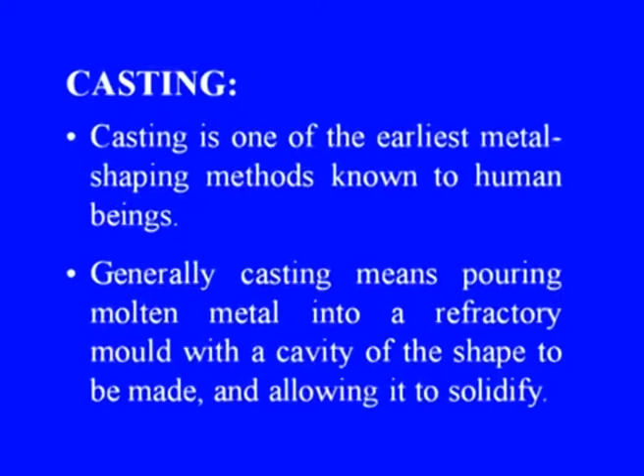Casting is one of the earliest metal shaping methods known to human beings. Generally, casting means pouring molten metal into a refractory mold with a cavity of the shape to be made and allowing it to solidify. Once solidified, the object is taken out from the mold either by breaking or by taking the mold apart. The solidified object is called casting.

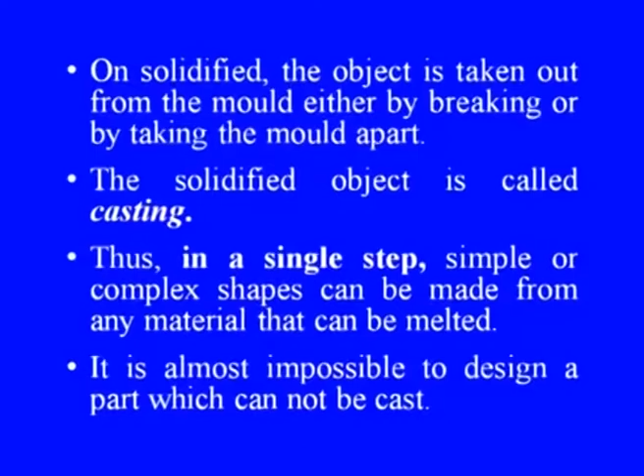Thus, in a single step, simple or complex shapes can be made from any material that can be melted. It is almost impossible to design a part which cannot be cast.

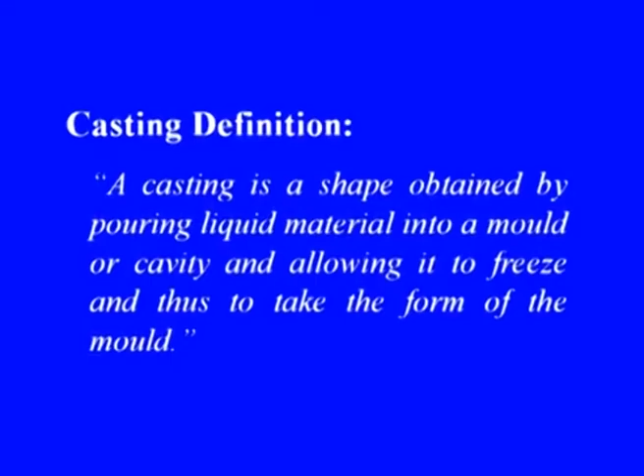Let us see a formal definition of casting. I quote, "A casting is a shape obtained by pouring liquid material into a mold or cavity and allowing it to freeze and thus to take the form of the mold." Unquote.

Let us peep into a little historical background of this process. Casting was probably discovered around 3500 before Christ in Mesopotamia. These molds were essentially of single piece.

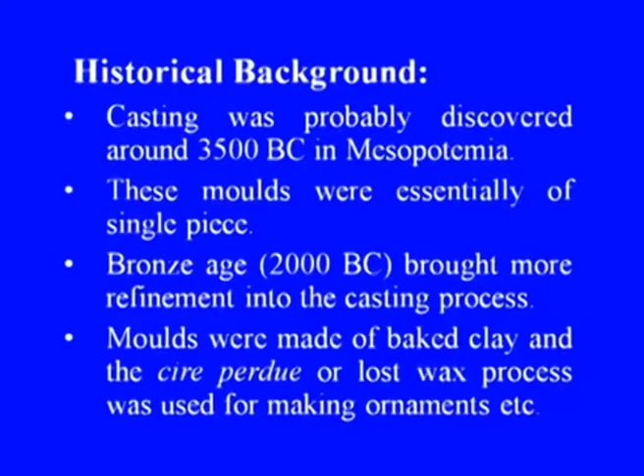The Bronze Age, estimated at 2000 BC, brought more refinement into the casting process. Molds were made of baked clay, and the cire perdue, or lost wax, process was used for making ornaments, etc. The technology was greatly improved by the Chinese from around the year 1500 BC.

The Indus Valley civilization has evidence of cast products too. Here is a photograph of a cast mold.

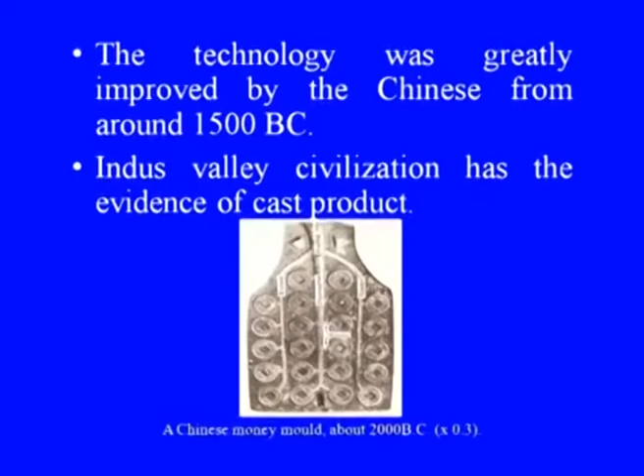Now, let us see the casting problem. It can be basically divided into two areas: the design and production of the mold, and second, the melting, refining, and pouring of the liquid metal.

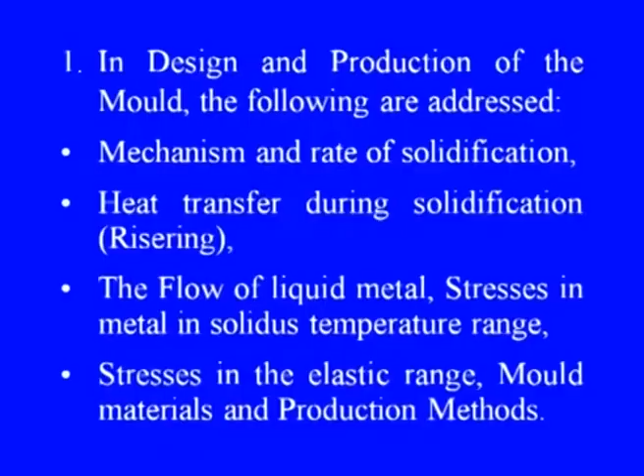In design and production of the mold, the following are addressed: mechanism and rate of solidification, heat transfer during solidification, the flow of liquid metal, stresses in metal in the solidus temperature range, stresses in the elastic range, and mold materials and production methods.

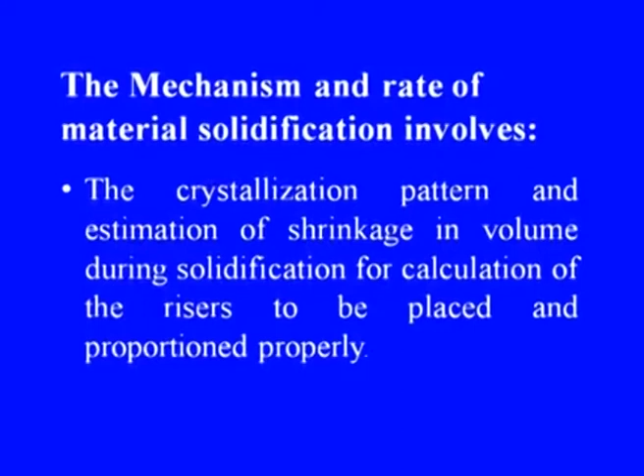The mechanism and rate of material solidification involves the crystallization pattern and estimation of shrinkage in volume during solidification, for calculation of the risers to be placed and proportioned properly. These factors vary considerably depending upon the chemical composition of the material and thermal gradients in the mold. Thus, in this process, engineering analysis tools can help significantly.

The melting, refining, pouring of the liquid material aspect is generally studied through: number 1, gases in materials; number 2, control of common elements; and number 3, selection and control of melting furnaces.

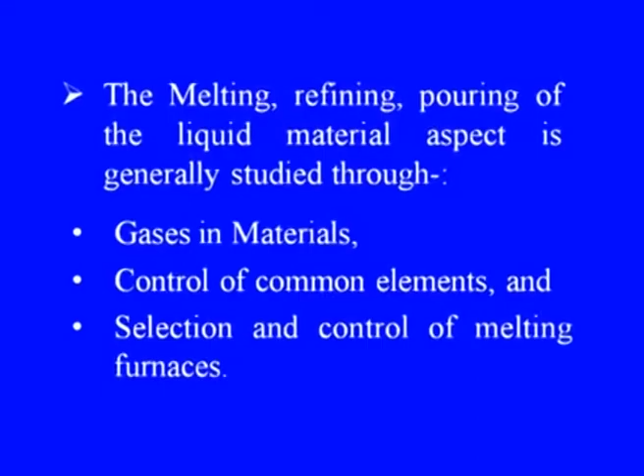Now let us look into the solidification process. The time taken for solidification of casting is relatively a very brief period in the entire production history. During this short time, the original crystal structure of the casting is formed, which is considered the backbone of the casting, on which many other properties depend. In this interval, major flaws such as shrinkage, porosity, hot tears, and seams can be prevented depending upon the care with which the solidification has been planned.

Let us now discuss the crystal nucleation process. There are two types of nucleation: number 1, homogeneous nucleation, which is the formation of a new phase without the help of special nucleation sites; and number 2, heterogeneous nucleation.

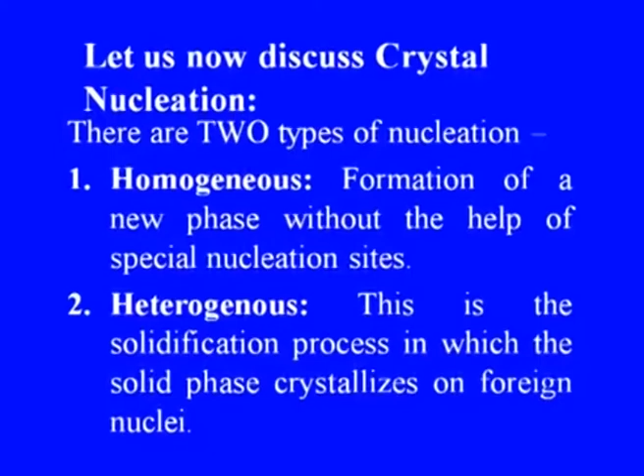In the heterogeneous nucleation process, the solidification process is one in which the solid phase crystallizes on foreign nuclei. The temperature at which homogeneous nucleation takes place is always below the equilibrium freezing point, because it is necessary to overcome the surface tension forces which slow down nucleus growth.

The energy required to produce a nucleus of solid is the difference in free energy per unit of volume between the liquid and solid phases. This energy, also called the bulk free energy change, is designated as delta F(V), expressed in calories per cubic centimeter for a given temperature of supercooling.

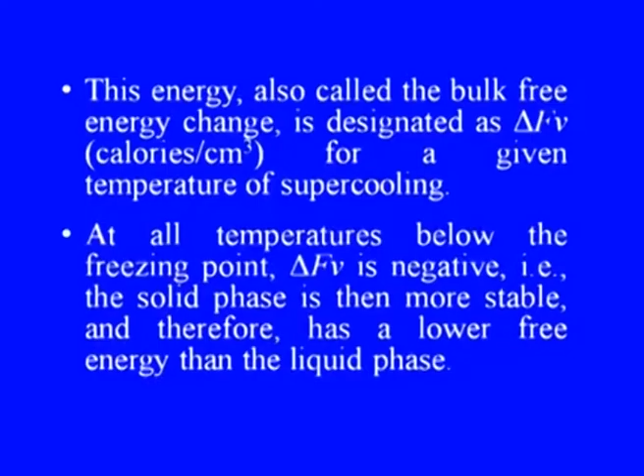At all temperatures below the freezing point, delta F(V) is negative, that is, the solid phase is then more stable and therefore has a lower free energy than the liquid phase.

The bulk free energy change associated with the formation of a spherical particle of radius r is given by 4/3 into pi r cube into delta F(V).

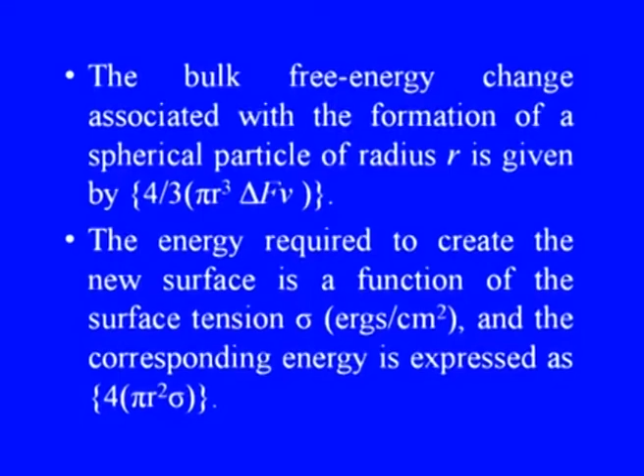The energy required to create the new surface is a function of the surface tension sigma, expressed in ergs per centimeter square, and the corresponding energy is expressed as 4 into pi r square into sigma.

The net free energy change, delta F, is then expressed as delta F equals 4 pi r square into sigma plus 4/3 pi r cube into delta F(V).

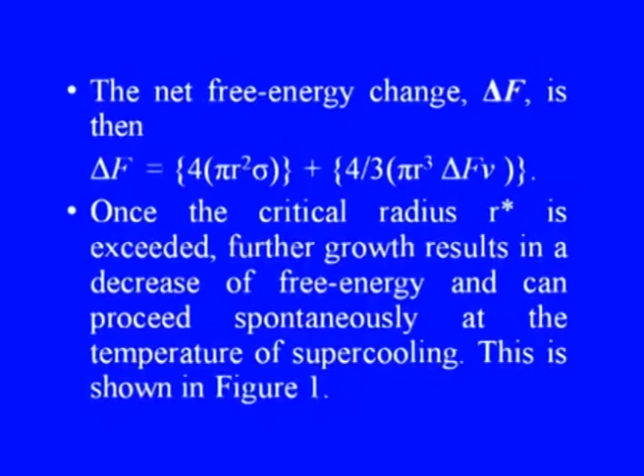Once the critical radius r star is exceeded, further growth results in a decrease of free energy and can proceed spontaneously at the temperature of supercooling. This is shown in figure 1, where this is the critical radius r star.

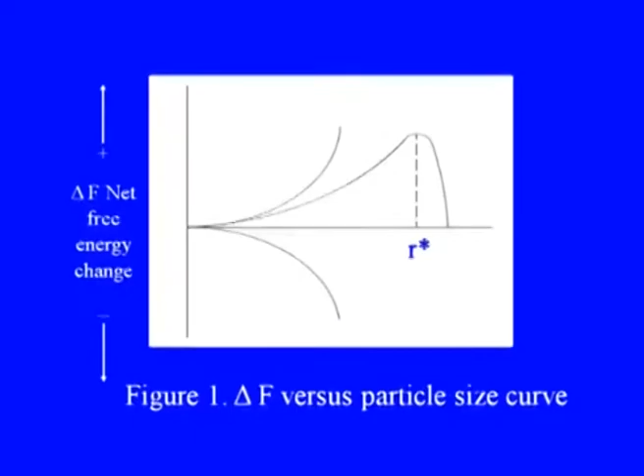If a particle has a radius smaller than r star, it will redissolve because this decrease in size reduces the free energy.

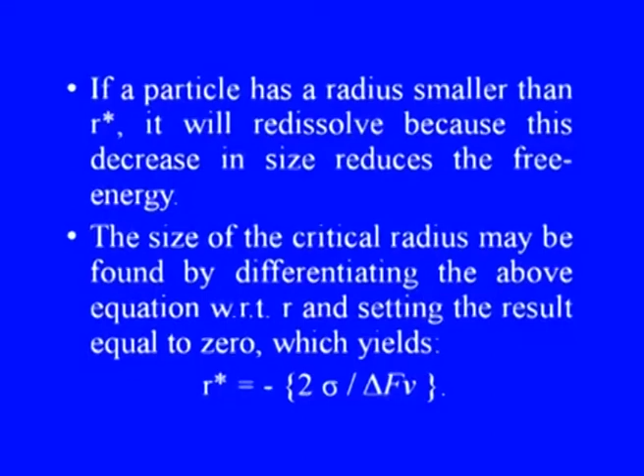The size of the critical radius may be found by differentiating the above relationship with respect to r and setting the result equal to 0, which then yields r star to be equal to minus 2 sigma by delta f v.

The r star relation indicates that for r star to become very small, delta f v must become very large in a negative sense. That is, severe supercooling is needed for homogeneous nucleation. Also, the term sigma does not change greatly with temperature. On the other hand, delta f v increases with supercooling and therefore causes a very small nucleus to be stable.

Let us come into heterogeneous nucleation process. Most actual castings crystallize by heterogeneous nucleation process. The reason being, if the new phase can find a foreign particle to grow upon, it can adopt the relatively large radius of the particle as its own. It means only a slight degree of supercooling is needed in comparison with that needed for homogeneous nucleation.

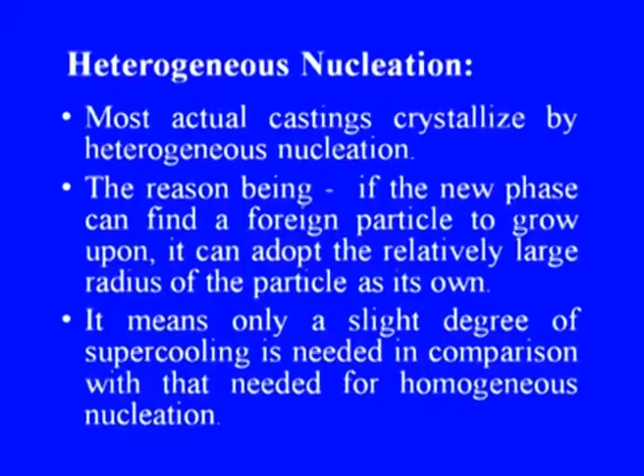Quantitatively, the relation depends upon the degree to which the new phase wets the foreign particle. If there is no attraction between the atoms of the foreign particle and those of the precipitating phase, then nucleation is not helped.

The wall of a mold usually provides many heterogeneous nucleation sites. That is how the solidification process begins.

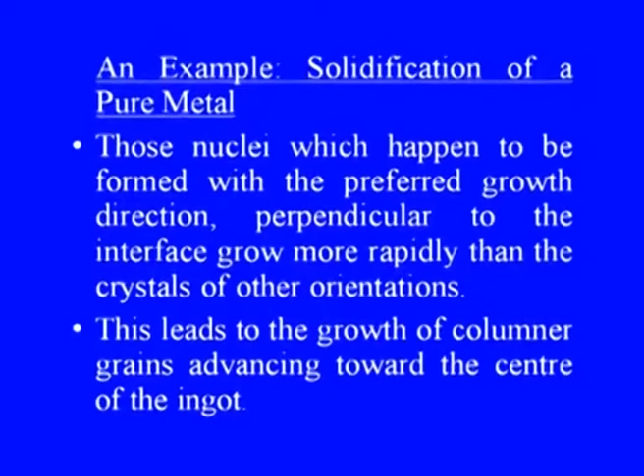Let us see an example of solidification of a pure metal. Those nuclei which happen to be formed with the preferred growth direction perpendicular to the interface grow more rapidly than the crystals of other orientations. This leads to the growth of columnar grains advancing towards the center of the ingot.

The final structure therefore consists of a thin layer of randomly oriented grains at the mold surface and columnar grains extending to the center line. In this situation, there are no randomly oriented grains at the center of the ingot.

Solidification of actual castings. The solidification of alloys differs in three principal ways from that of pure metals. Number 1, usually the freezing of alloys occurs over a temperature range. Number 2, the composition of the solid which separates first is different from that of the liquid. And number 3, there may be more than one solid phase crystallizing from the liquid.

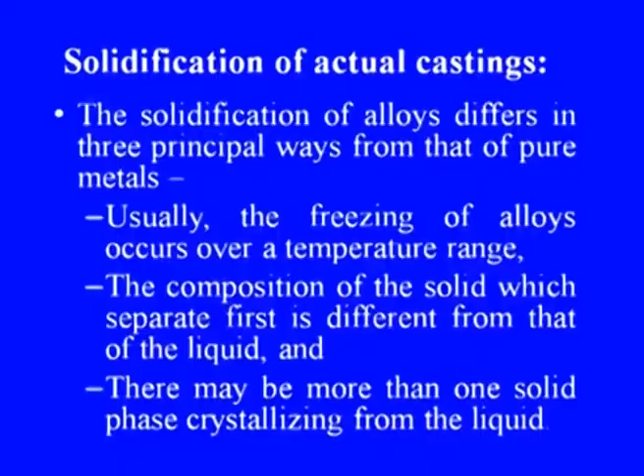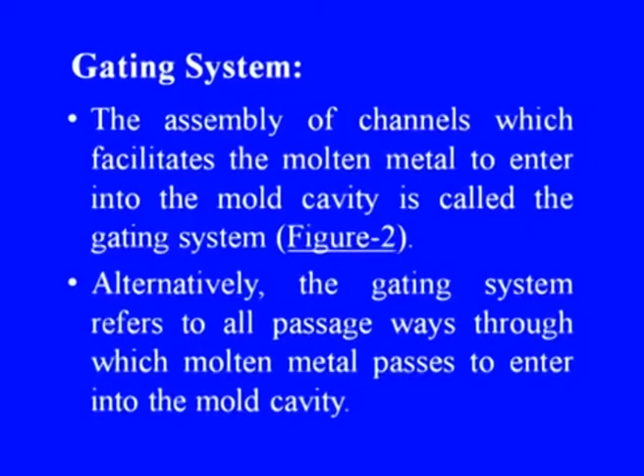Now let us see a gating system. The assembly of channels which facilitate the molten metal to enter into the mold cavity is called the gating system, as shown in the figure. Alternatively, the gating system refers to all passageways through which molten metal passes to enter into the mold cavity.

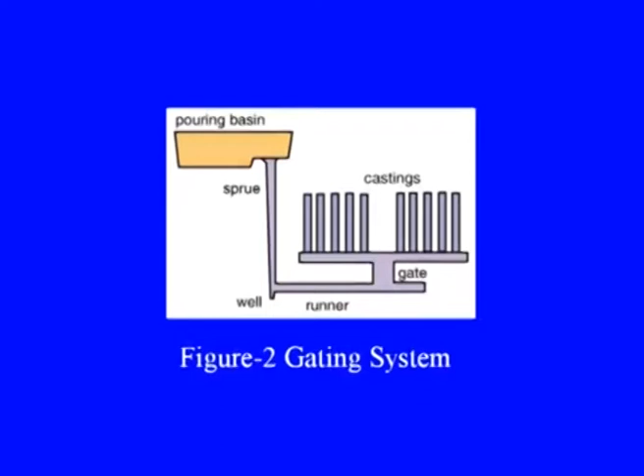This is a typical gating system in which this is the pouring basin. The molten metal comes through the sprue, which is constructionally tapered in shape. Then the liquid metal is distributed through this gating system into the various cavities.

What are the goals of a gating system then? This is to minimize turbulence to avoid trapping gases into the mold, then to get enough metal into the mold cavity before the metal starts to solidify. Then another goal is to avoid shrinkage.

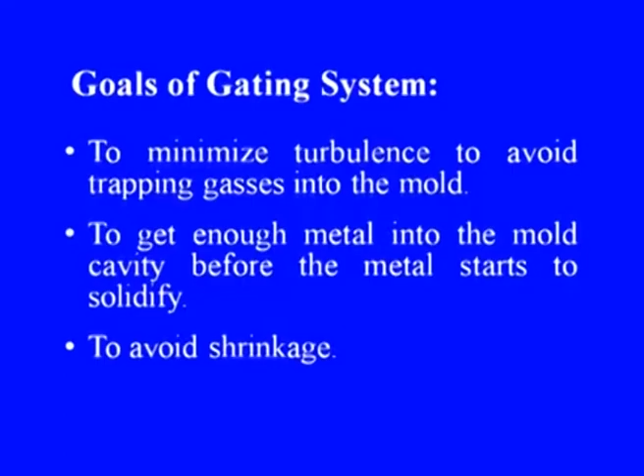To establish the best possible temperature gradient in the solidifying casting, so that the shrinkage, if it occurs, must be in the gating system, not in the required cast product. Thereby, it helps in retaining the appropriate or desired tolerances.

It also incorporates a system for trapping the non-metallic inclusions. The major design principles of gating system are as follows.

Turbulence can be avoided by incorporating small changes in the design of the gating system. The sharp changes in the flow should be avoided in favor of smooth changes. The gating system must be designed in such a way that the system always runs full with the liquid metal.

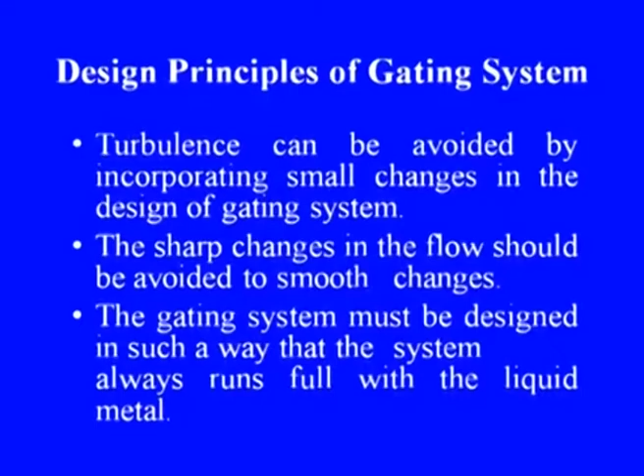In gating system design, sharp corners should be avoided. Any changes in direction or cross sectional area should make use of rounded corners. To avoid aspiration, tapered sprues are designed in the gating systems. A sprue tapered to a smaller size at its bottom will create a choke which will help keep the sprue full of molten material.

Types of gating systems: the gating systems are of two types, pressurized gating system and unpressurized gating system. In pressurized gating system, the total cross sectional area decreases towards the mold cavity. Back pressure is maintained by the restrictions in the metal flow.

Flow of liquid is almost equal from all gates. Back pressure helps in reducing the aspiration as the sprue always runs full.

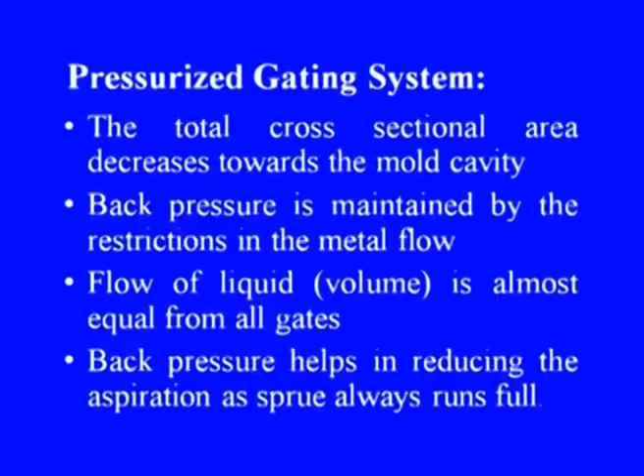Because of the restrictions, the metal flows at high velocity, leading to more turbulence and chances of mold erosion.

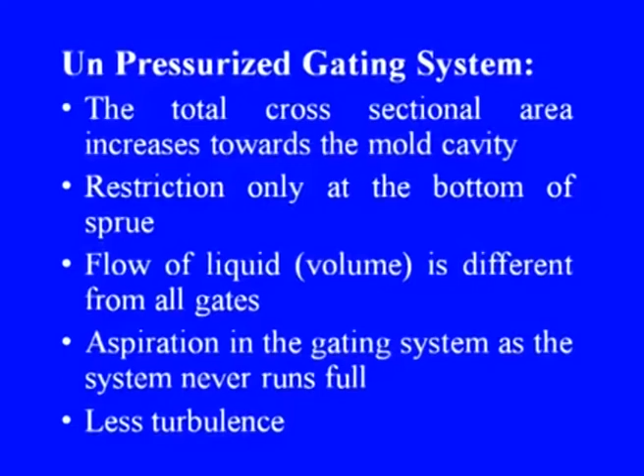In an unpressurized gating system, the total cross sectional area increases towards the mold cavity, with restrictions only at the bottom of the sprue. The flow of liquid is different from all gates, and there is aspiration in the gating system as it never runs full, so there is less chance of turbulence.

Now let us consider the risering system. A riser is a reservoir of extra metal which flows from the riser to the mold cavity to compensate for shrinkage which takes place in the casting when it starts solidifying. Without a riser, heavier parts of the casting will have shrinkage defects either on the surface or internally. Risers are known by different names, such as metal reservoirs, feeders, or headers.

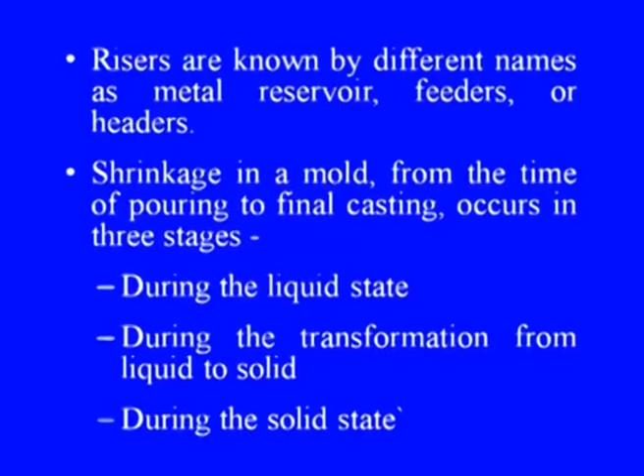Shrinkage in a mold, from the time of pouring to final casting, occurs in three stages: number one, during the liquid state; number two, during the transformation from liquid to solid; and number three, during the solid state. The first type of shrinkage is compensated by the feeders or the gating system.

For the second type of shrinkage, risers are required. Risers are normally placed at that portion of the casting which is last to freeze. A riser must stay in liquid state at least as long as the casting and must be able to feed the casting during this time.

Now let us see the functions of a riser. It provides extra metal to compensate for volumetric shrinkage. Risers also allow mold gases to escape, and they provide extra metal pressure on the solidifying mold to reproduce mold details more exactly.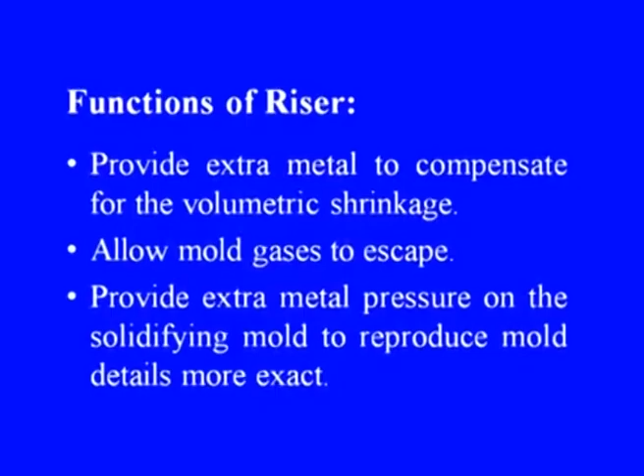Now, what are the design requirements of risers? First is the riser size. For a sound casting, the riser must be the last to freeze. The ratio of volume to surface area of the riser must be greater than that of the casting.

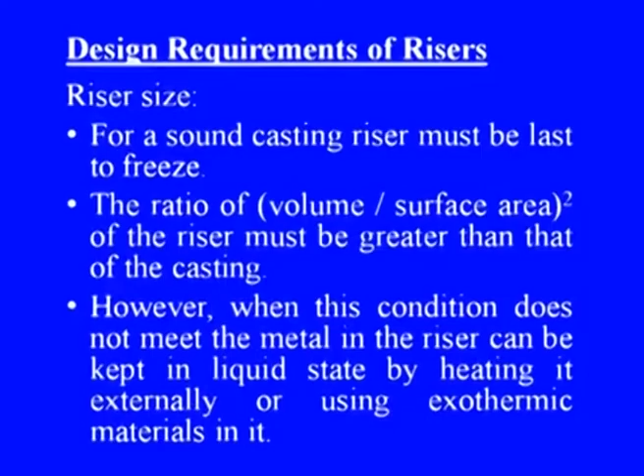However, when this condition does not meet, the metal in the riser can be kept in liquid state by heating it externally or using exothermic materials in it.

The way the riser is connected to the casting is very important. The connection, called the neck, should solidify first, so that the shrinkage cavity is located in the riser itself. The removal of the riser should be made simpler by making the neck smaller. But if the neck is too small, it might solidify earlier than the casting, defeating the whole purpose.

A normal practice is to provide a thin ceramic or core material for the neck to reduce the cross sectional area. These are called Washburn cores.

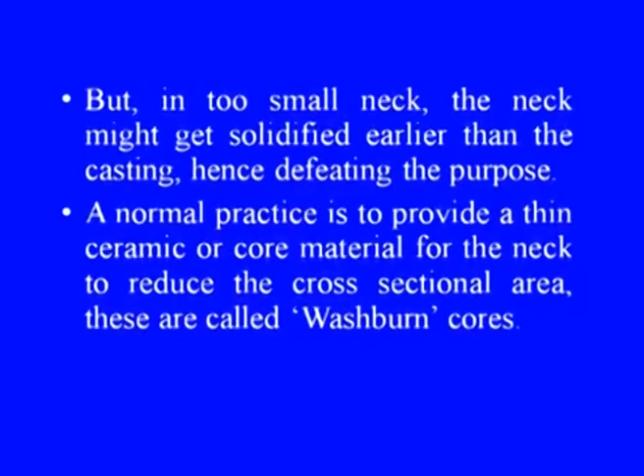Let us see a few basic terminologies associated with casting technology. This will be useful throughout this module, because we will be dealing with most of the casting techniques at various points of time. Some of these are illustrated through sketches in figures 2 and 3 later on.

One very important terminology associated with casting is the core. This is made by a special process which enables creating a hole or internal passage within a casting, which is very important as far as casting technology is concerned.

Then, chills. These are metallic pieces which are kept at bulk sections that need to be cooled faster. They eventually help to provide uniform solidification.

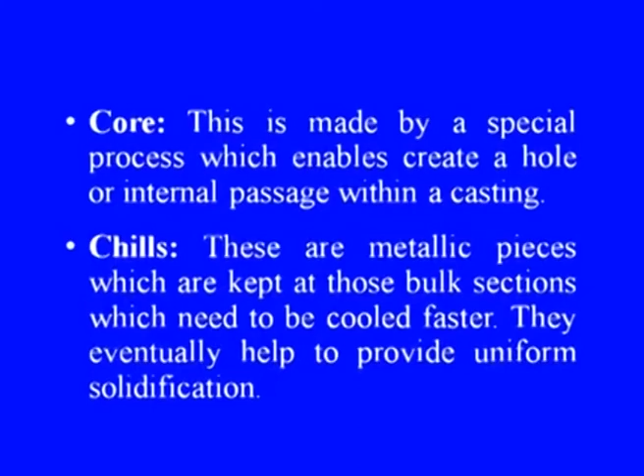In other words, or rather in heat transfer terminology, we can call these nothing but some kind of heat sinks, like we use fins in some cases. So these metallic materials provide larger area which are in contact with the heated object, or in the vicinity of the heated object, so that the rate of heat transfer can be faster.

As we know, the rate of heat transfer is proportional to the area of heat transfer. Therefore, this is nothing but a technique to enhance the heat transfer area.

So what is the advantage of this? The advantage is, as the rate of heat transfer becomes faster, the solidification can be homogeneous. Otherwise, in cases where the section is thicker, the quantity of molten material is higher, and therefore it may take more time to get solidified, or rather to reject the heat from the molten metal.

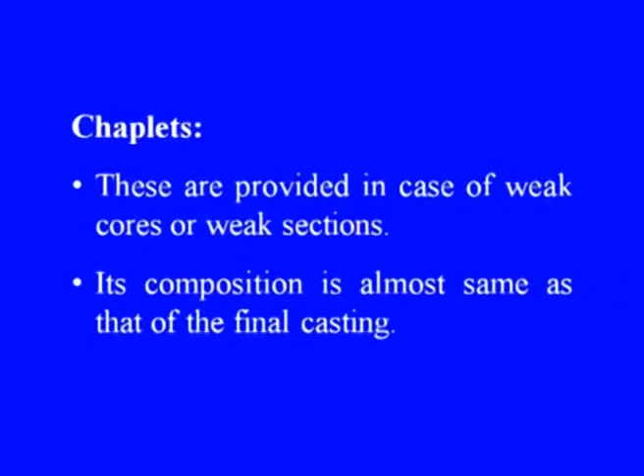Another important term quite often used is chaplets. These are provided in case of weak cores or weak sections, as we have just discussed. The cores are nothing but some holes or passages provided. By providing passages, in some cases the section becomes very weak, which may not be able to withstand the load of molten metal. Therefore, these chaplets are used to strengthen these weak sections.

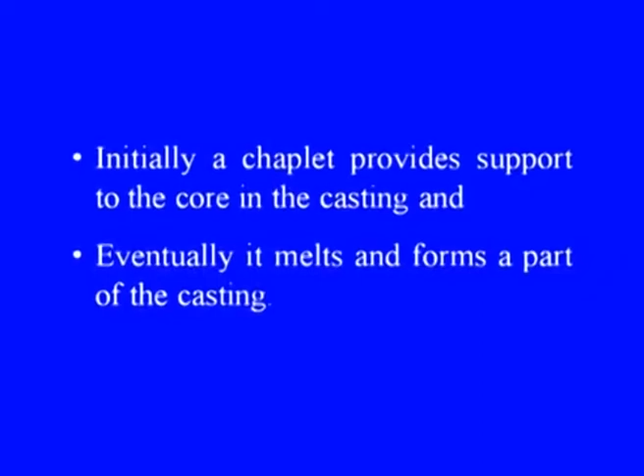Its composition is almost the same as that of the final casting, so that diffusion or other problems are minimized. Initially, a chaplet provides support to the core in the casting, and eventually it melts and forms a part of the casting. That is why similar composition is preferred, so that the cast product does not lose its properties or deviate from what is designed.

Another important term is pattern, which we will be using almost in every session discussed in this module. It is the replica of the required cavity or shape. It resembles the required casting with allowances in it. It is made of wood, metal, wax or plastics, as the situation permits.

For example, if we use wax, it is lost because of coming in contact with the very high temperature molten material. On the other hand, if metallic patterns are used, they can be reused for several cycles.

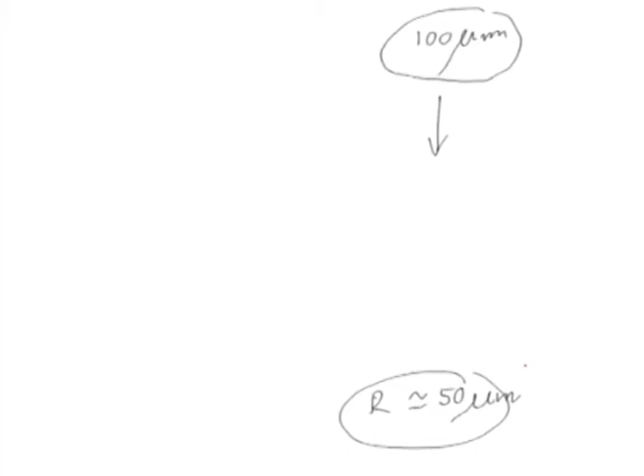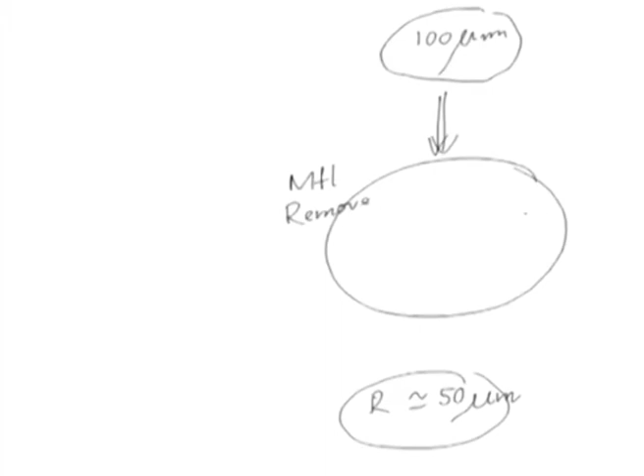Another important aspect of the pattern is the final finishing. Some patterns may need post-processing, for example, to achieve a pre-required surface finish, say from 100 micrometer to Ra equal to 50 micrometer. What I need is some reworking, some material removed from the original cast, which we can call the raw casting.

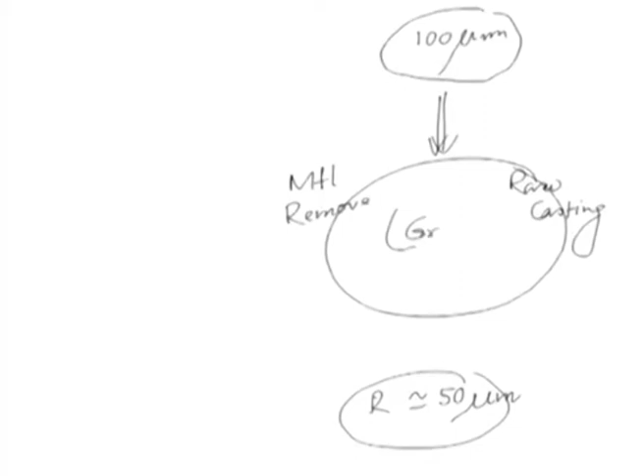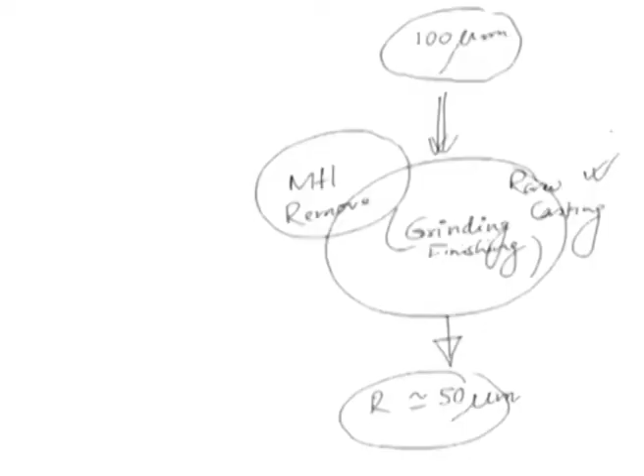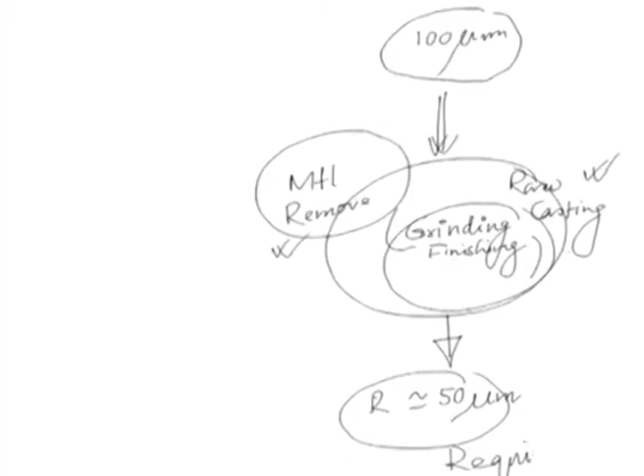This process may be grinding or some other finishing process. Now, from where will this additional material be sacrificed? This indicates that we may have to allow some additional material in the raw casting itself. That means the pattern has to be made slightly oversized, so that it produces a slightly bigger casting than required, and this additional material will be removed as part of the finishing process, which will ultimately give us the required dimension.

Another important term closely associated with molding or casting technology is the mold box. It is the flask which contains the mold material in it. It can be a single box, two boxes, or multiple ones. In case of a double box, the top is called the cope and the bottom box is called the drag.

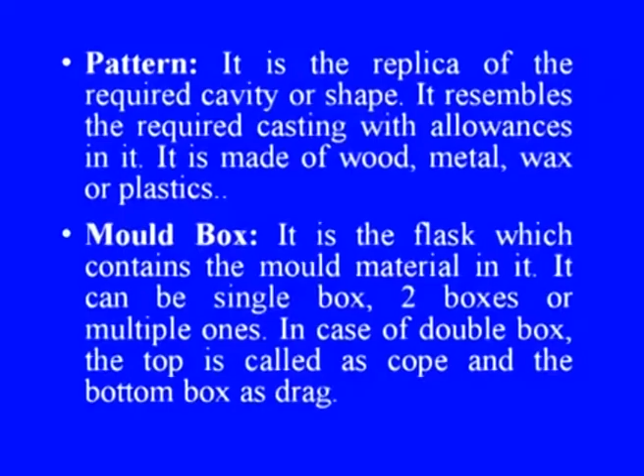Then, molding material. In most cases, sand is the desired molding material, since it has high refractory property as well as being cheap. Sand is mixed with other ingredients as desired, like to make it more flowable, or in some cases to make it more binding, binders are used, and so on.

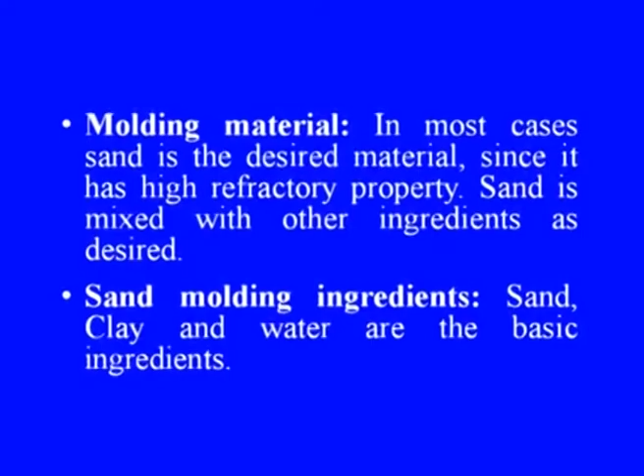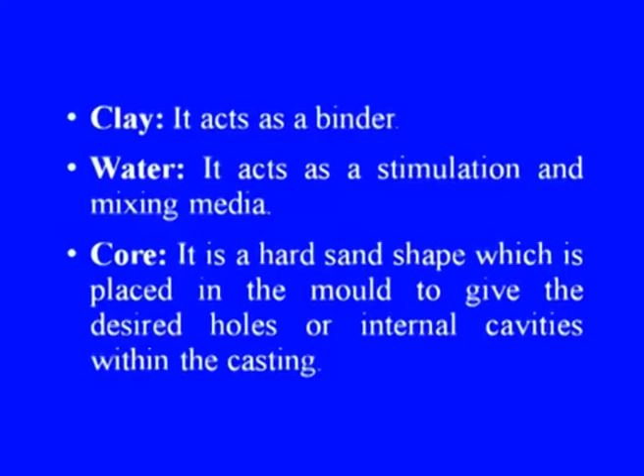Sand molding ingredients include sand, clay and water. In some cases, other materials as binder are also used, like clay content, to give binding properties. Then the core - what is a core? It is a hard sand shape which is placed in the mold to give the desired holes or internal cavities.

What is a core print? This is another important term. It is the region added to the core or pattern, usually at its ends, which helps it sit in the cavity in the proper region.

Then core seat - the corresponding section in the mold where the core print gets located is called the core seat.

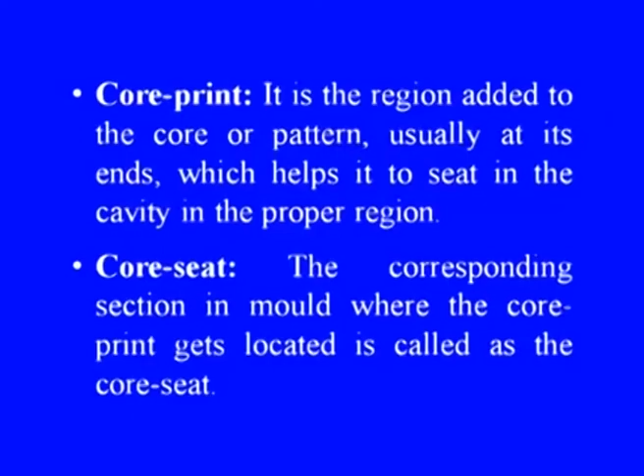Another important term is ladle. A ladle is a device having a crucible with handles at its ends. It is used to carry the molten metal from the furnace to the molds. There are different types of ladles to suit different requirements.

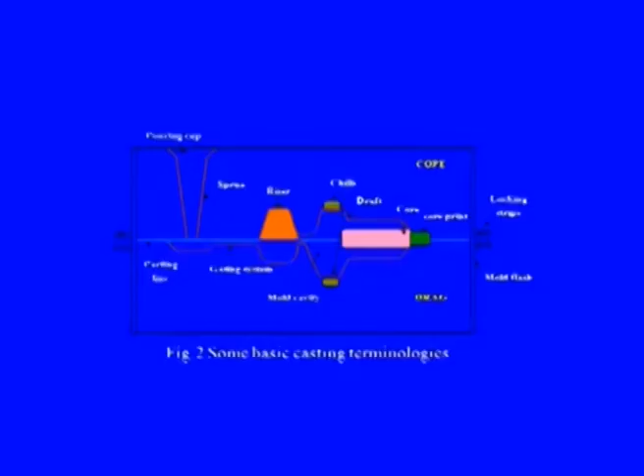So this is a generalized picture as displayed on the screen. This figure describes almost all the important terminologies associated with the casting process.

This is the core, as we were talking about, and this is the core print. This core is the hole or passage for the molten material to pass through. This is the pouring cup, where the molten material will be poured and settle, then it will flow through this and needs to be delivered to this part and this part.

These are the chills that we were talking about, the metallic portions provided for enhancing the heat transfer inside the core, inside the casting.

So here we can notice, as we have already indicated, this is the largest section of this particular casting. Therefore it ideally contains more quantity of molten material, and it will take longer time to get solidified, because the heat content will be high and this contained heat needs to be transferred out, taking more time, provided the area around it through which the heat gets transferred remains the same.

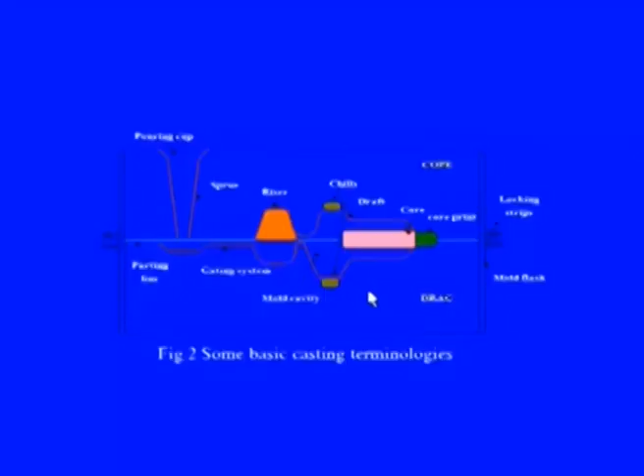To improve upon this situation, because this casting has different sections, some relatively smaller than this section, there is a possibility that these thinner sections will get solidified earlier than the larger sections. To eliminate this inhomogeneity in solidification, these chills are provided, as can be seen here.

These are metallic plates which act as heat sinks and help provide a better heat transfer rate in these large sections, so that non-uniformity in the rate of heat transfer at different sections of the casting gets reduced.

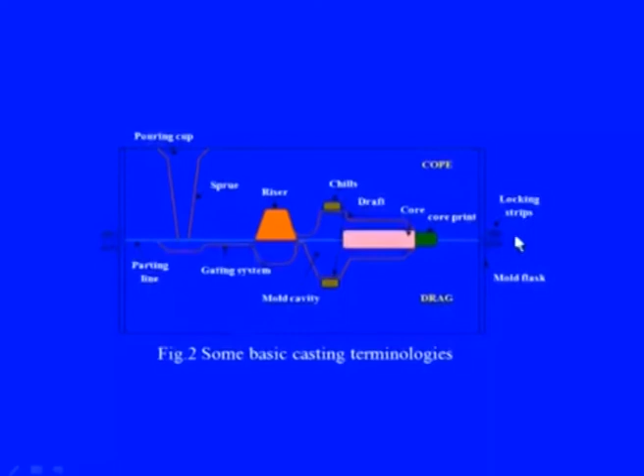As far as the box is concerned, which I was talking about a few minutes back, in this particular figure there are two boxes provided. One is called cope, the top box, and this is the parting line, and this is the drag, the lower portion, the lower half of this box. This is called drag.

Next is the pouring cup or pouring basin. We have seen this in the figure just now. It is the initial region in the gating system which first receives the molten metal from the ladle and allows it to move through.

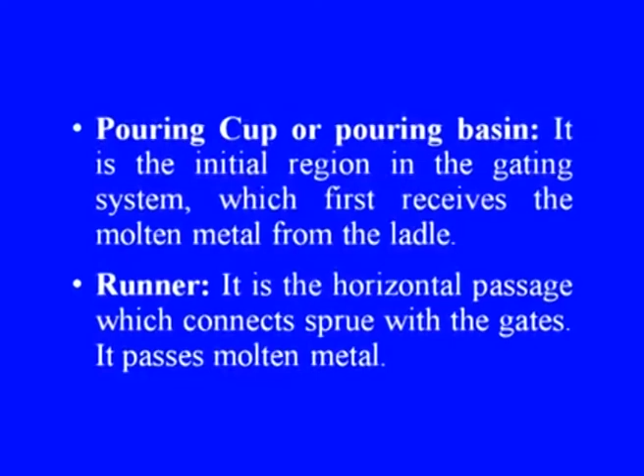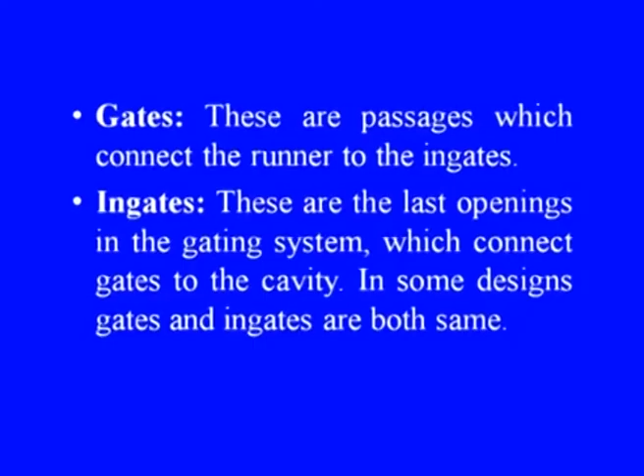Then the runner, it is the horizontal passage which connects the sprue with the gate. It passes molten metal to the subsequent sections. Then the gate, these are passages which connect the runner to the in-gate. The in-gate is the last opening in the gating system which connects the gate to the cavity. In some designs, the gate and the in-gate are both the same.

So this is a typical gating system we were talking about. This is the sprue, and this is the pouring cup, and from the ladle the liquid molten material will be poured here.

This will facilitate the molten material to flow through, and this is the gate through which the material will be delivered to the cavity where the casting is to be produced, and these are the in-gates.

The number of branches are created so that the distribution of the molten material is at a uniform rate, and this helps in maintaining uniform temperature as far as possible while delivering.

And this is the riser, which provides additional molten material so that during solidification, if the molten material shrinks, which usually happens, liquid occupies more volume in most cases, and while solidifying the volume gets shrunk.

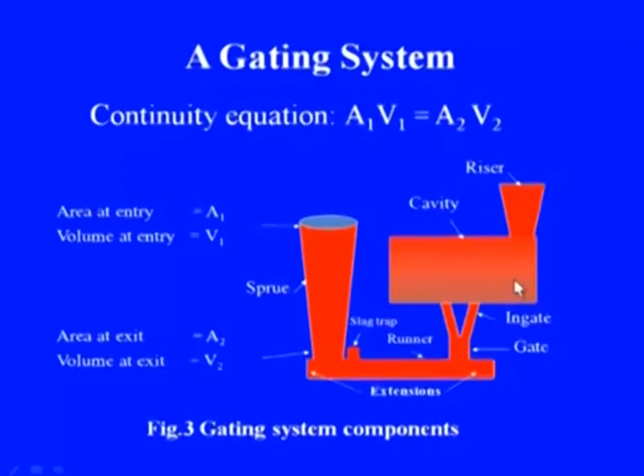Then, to fill the remaining portion, this riser provides additional molten material which it keeps as a reserve. This reserved molten material is used so that no void or volume is left unfilled inside the casting because of solidification.

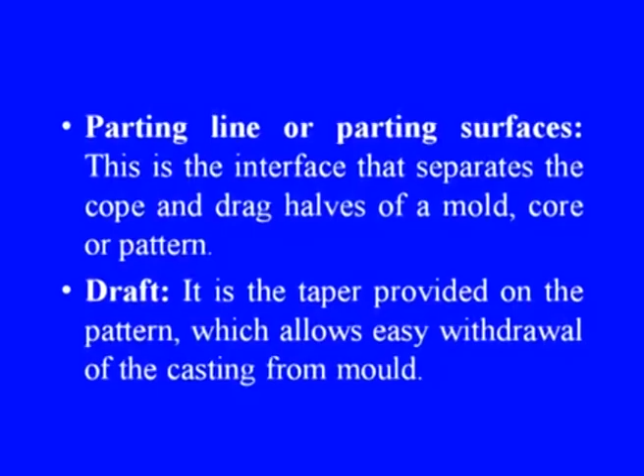Another important terminology as far as casting is concerned is the draft. It is the taper provided on the pattern which allows easy withdrawal of the casting from the mold. We can see this in the previous figure as well, as a taper.

Now let us summarize what we have discussed in this session. We have discussed the basic features and terminologies in the casting process, gating and risering systems and their design aspects, and the basics of solidification or casting formation. We hope this session was informative and interesting. Thank you.